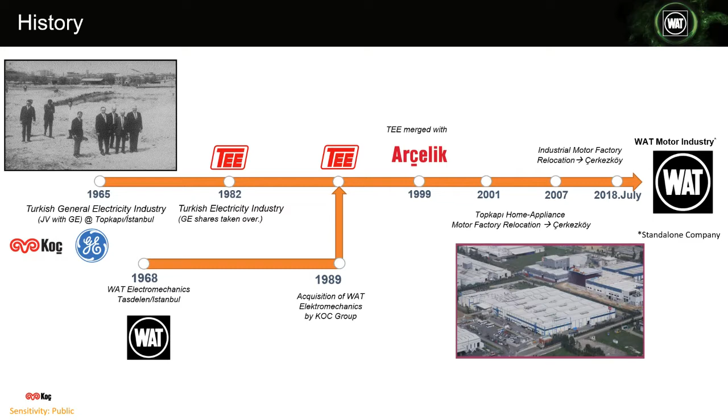WAT Motor's history dates back to 1965 with the joint venture of Koç Group in Turkey and General Electric of the US. What's known as Turkish Electric Industry, TEE, acquired some extra factories and merged with Arçelik Group, which is active in durable house goods. In 2018, WAT became a standalone company, mainly focused on electric motors and its electronics.

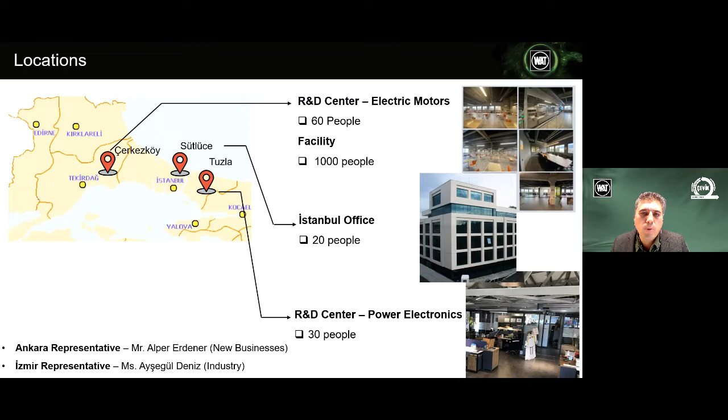Our locations are in Turkey, and we are mainly active in the European region and some other locations. Our factory and headquarters are located in Çerkezköy, where about 1,000 people work. Also, our R&D center on electric motors is located in Çerkezköy. We have a marketing and sales office in Istanbul, and also a second R&D center on power electronics in Tuzla, in the Istanbul area.

Our facility has a 40,000 square meter closed area, and we are about 87 kilometers away from Istanbul airport, and we are very near the Greece border.

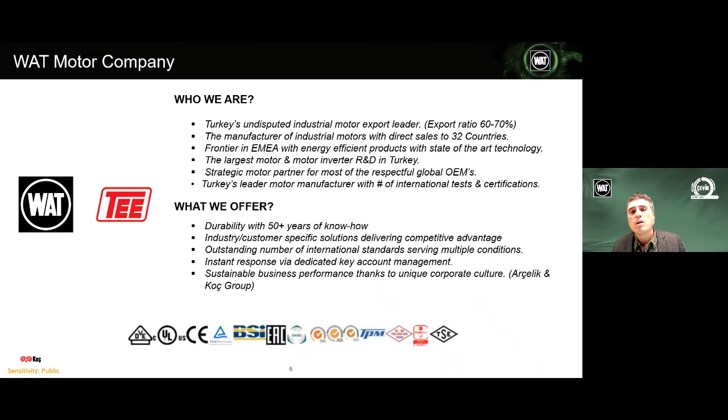As a short introductory note, WAT is the export leader in Turkey on electric motors. We are mainly active in international sales and export markets. We have the largest electric motor R&D center in Turkey. We are the strategic partner of most of the blue chip, respectful global OEMs, mainly in the European area. And we are also the leading Turkish electric motor manufacturer in terms of international test certifications and compliance documentation.

As I said, our company is active in export markets. Our main export market is the European region. We also export our products to the US market and the Far East market. We are the only company that exports products to China, provided by the China Energy Labeling compliance documentation. We also want to increase our penetration into the emerging markets.

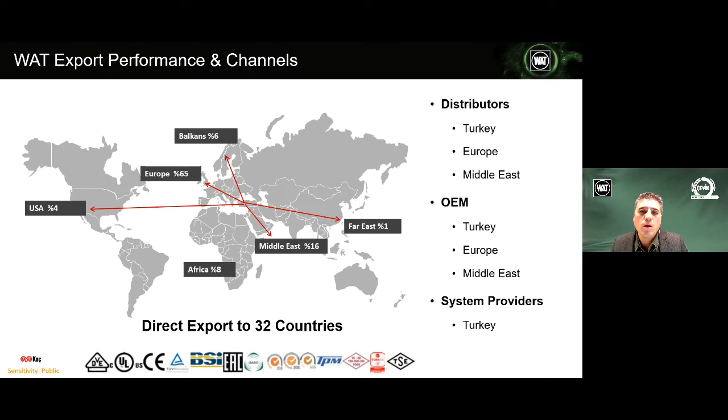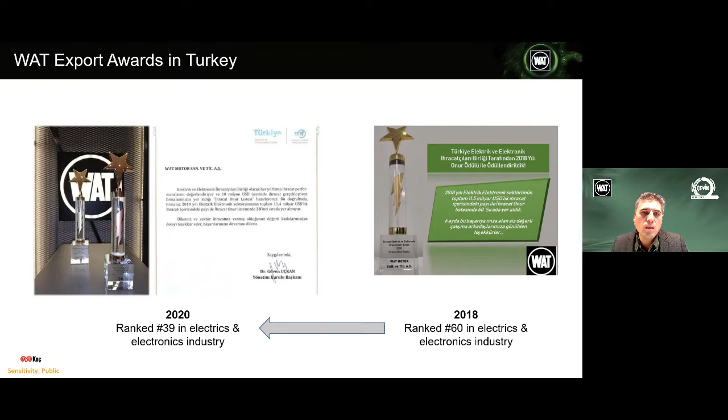We have some export awards in Turkey. We are ranked in 39th place in export of electric and electronics goods.

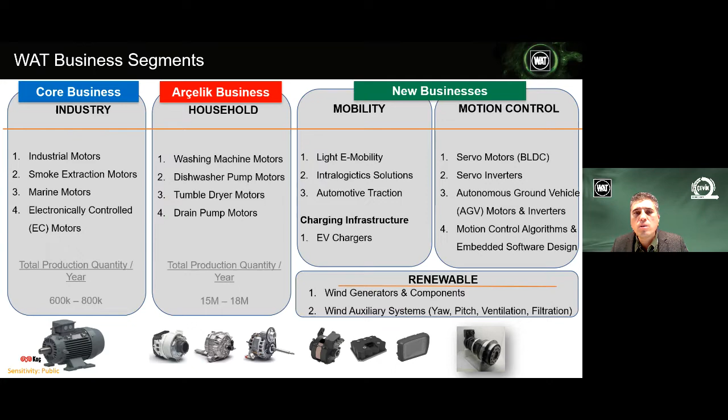We have two main businesses: first, industrial motors; the second is production of household electric motors. We also have several new business areas, those being electromobility, motion control, and renewable energy components.

Also, our production and new investments are supported by the Turkish government. We have incentive programs from the Ministry of Turkish Technology and Industry. Those incentives are announced by the President of Turkey.

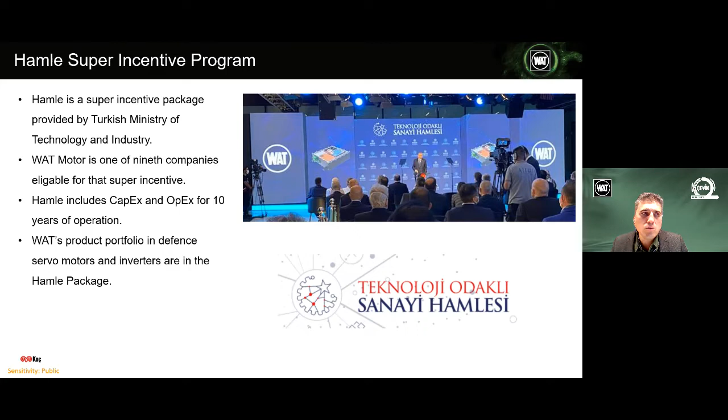As I said, we have a very good R&D capability. We have 90 people in R&D, nearly 70 of them engineers and designers, and also 20 colleagues working as office technicians and laboratory technicians. We have all the background of software inventory and testing in our laboratories, including testing of electric motors.

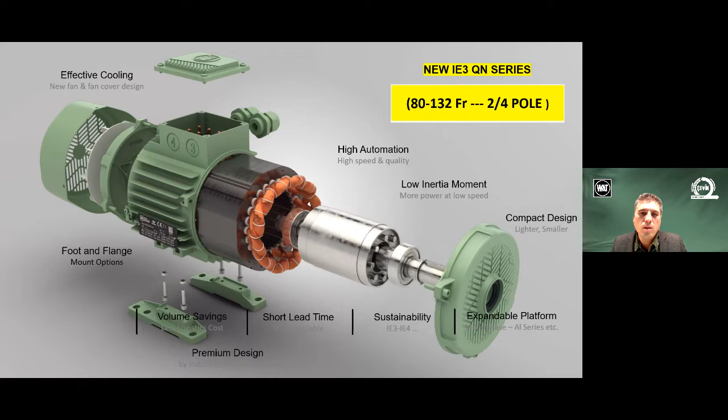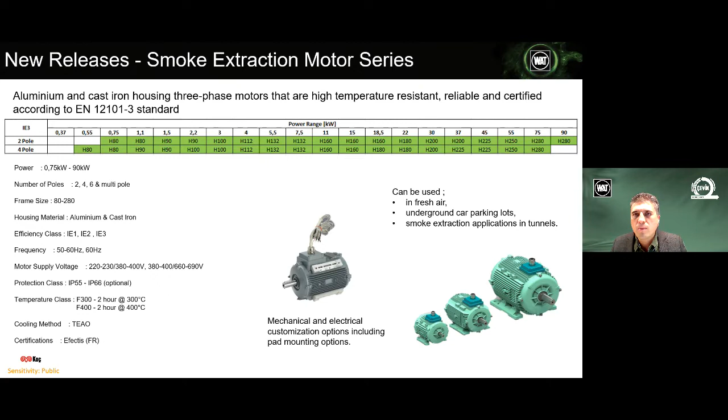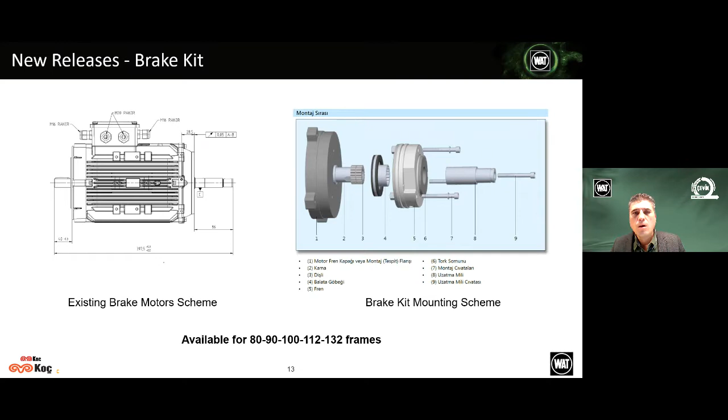For the new release, another example is the brake kit option. We are providing a brake kit option for certain frame sizes: 80 frame, 90 frame, 100 frame, 112 frame, and 132 frames. This is a very convenient solution for the product.

We have a small introductory video about this solution. You can get this brake kit option and convert your non-brake motors into brake ones with the help of an end shield. This end shield could be integrated, along with some extension part for the shaft, an extension kit for the shaft, and you can also insert fan blades and a deep fan cover for this solution, converting your non-brake motors into brake motors on your own.

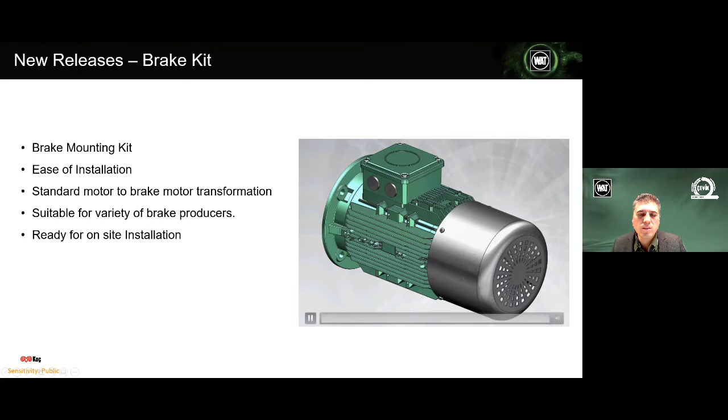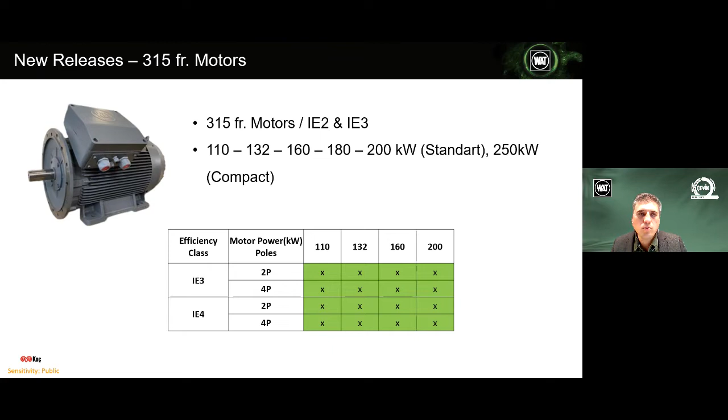We also start to produce 315 frame electric motors up to 200 kilowatts. Those motors could be provided both in IE3 efficiency level and IE4 efficiency level, in 2 poles or 4 poles. We can support you with this product as well.

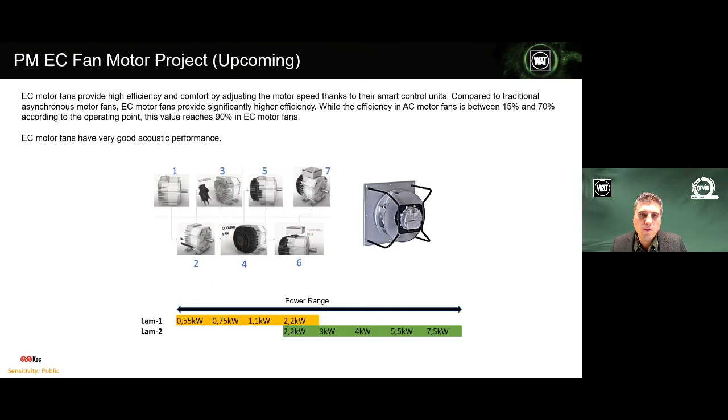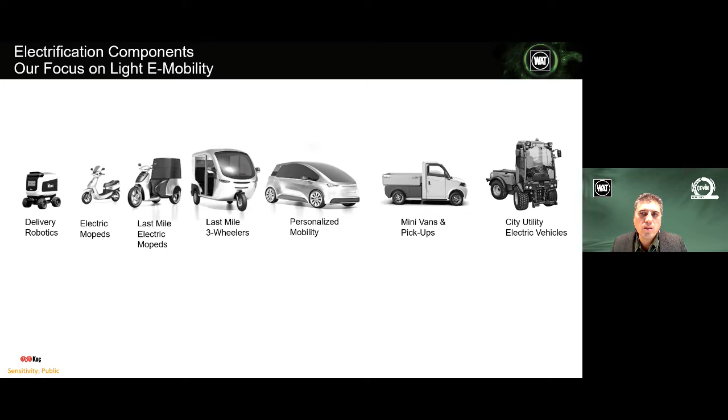As a new project, we are now working on electronically combined, or electronically controlled, electric motors. We will use these products in various applications. One main application could be the ventilation business segment. Also, we have some outputs in mobility, mainly working on light e-mobility solutions. We just introduced our electric traction unit electronic set for HMIs, onboard chargers, BLDC motor and BLDC inverter, which could be used in electric mopeds, electric motorcycles, for personal use or for last mile delivery issues.

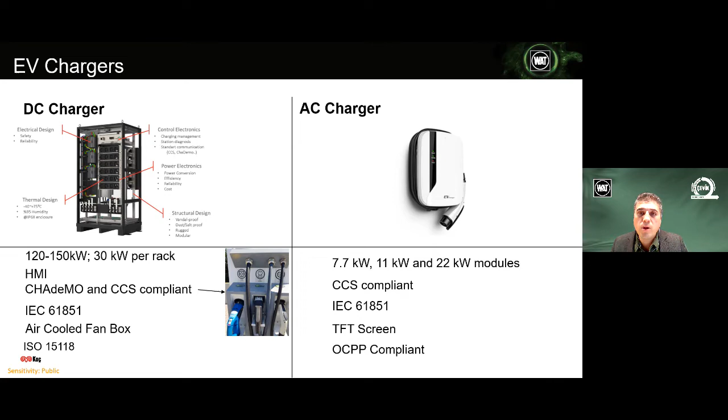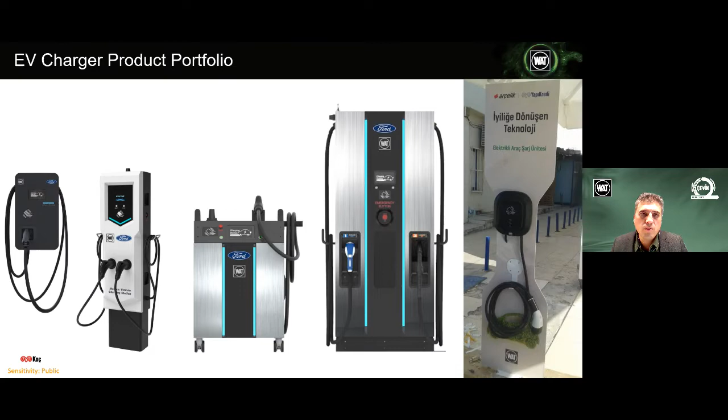We have also added some AC and DC chargers into our product portfolio. We provide those products for public charging or for private use. Those are some examples of our product line in EV chargers, and on the right-hand side you can see our first installation at Yapı Kredi Bank's Bodrum branch. We will also increase the numbers of those EV chargers, both in private and public use.

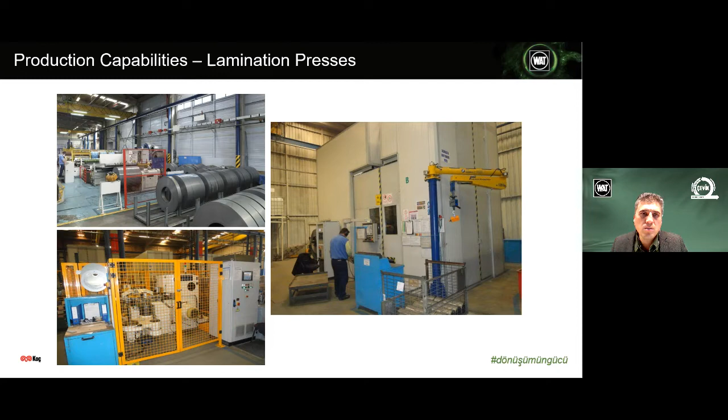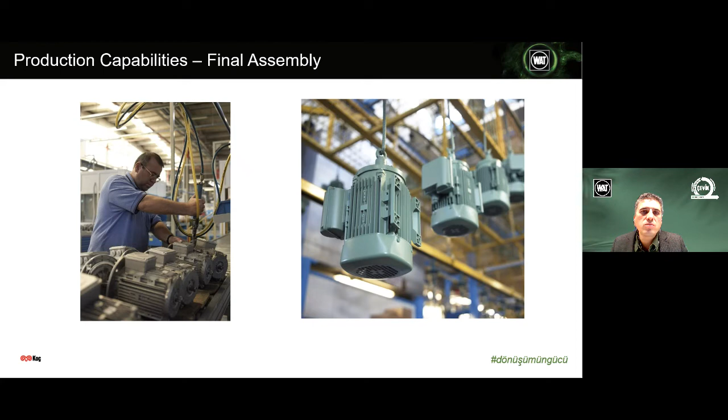I already mentioned some numbers about our facility. We have very good production capability in terms of lamination presses, Stator and Rotor production capabilities, winding and varnishing premises, and we have final assembly spots where we also make our performance test on the line. We have a very good inventory for production indeed.

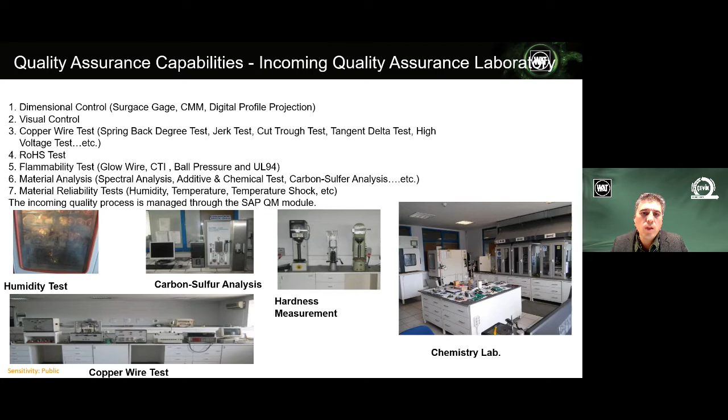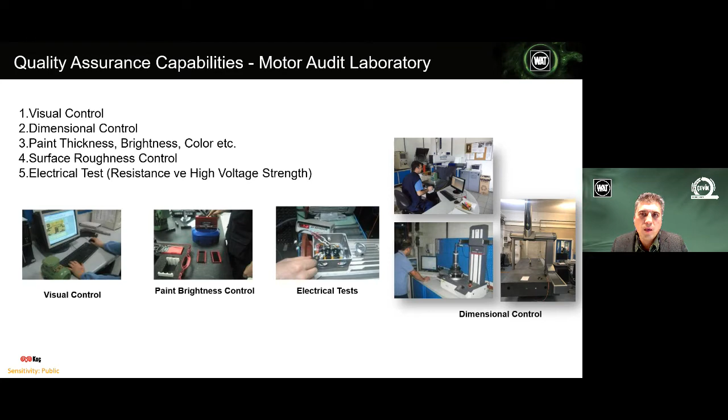We have seamless quality assurance capabilities, starting from incoming quality. We have a specialized incoming quality assurance lab, and also a motor audit lab for keeping production running smoothly. We have several facilities for motor laboratory testing, including environmental testing.

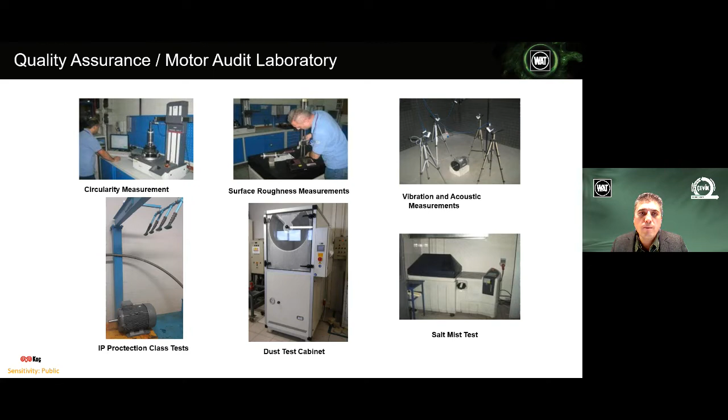Those are very brief information of what we have been working on at WAT Motor. Thank you for your attention. I would like to convey the speech through my dear colleague, Mr. Ibrahim, for the technical part. As I said, at the last part, we will answer your questions on this special topic in the Q&A session. Thank you very much, and hope to see you at the final stage.

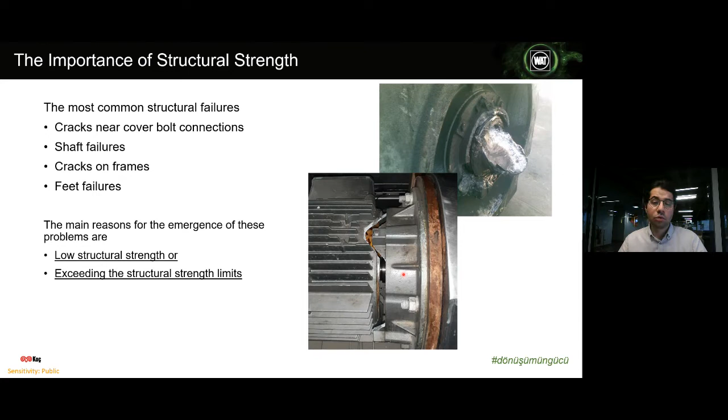Structural failure of machinery equipment may cause damage to peripheral equipment and systems, disruptions in mass production, and therefore loss of profit and production. And most importantly, it can pose a very serious risk to human health as well.

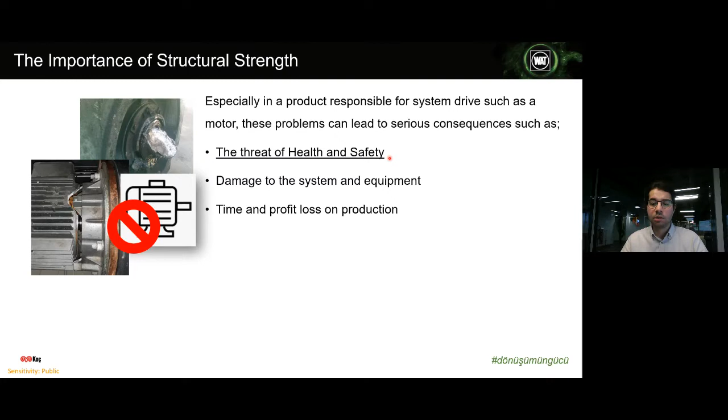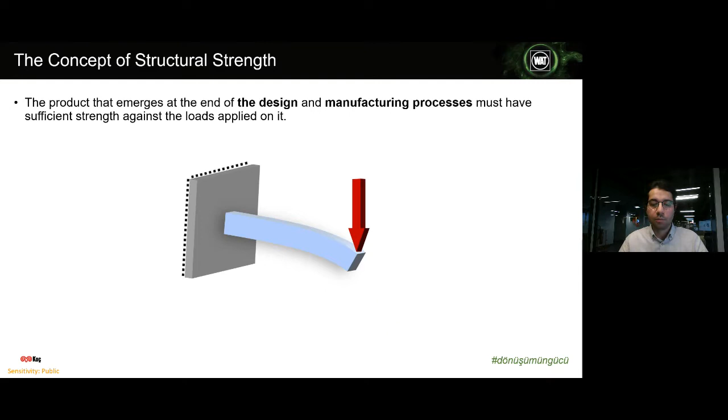To make sure of this, we must review the factors that affect structural strength. For example, geometry includes important parameters that affect the rigidity of the structure directly. As you can see, the amount of applied load directly affects the stress formed, up to a limit.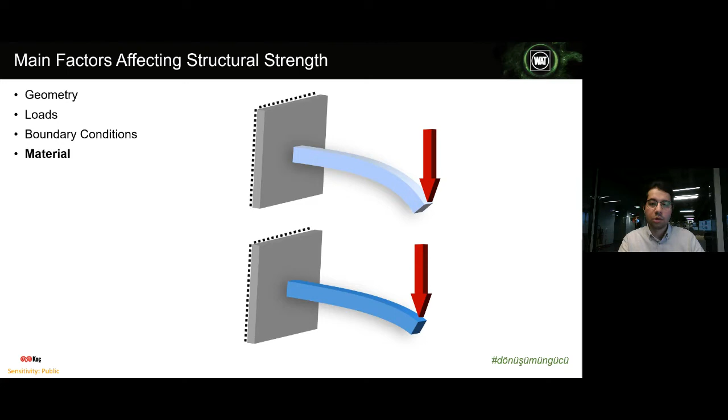Boundary conditions determine how the applied load will affect the structure. As a result, it changes how stress distributes over the structure. And finally, material properties determine whether the structure withstands these stresses that occur under all of these conditions, or fails. For example, the yield strength value.

Let's take a brief look at the paths we follow in conducting structural analysis. Let's imagine that the important factors we've just mentioned come together to form a static structure like this one. In order to create this setup, after the necessary research is done and information such as CAD data and material information is collected, a copy of a real structure is tried to be created

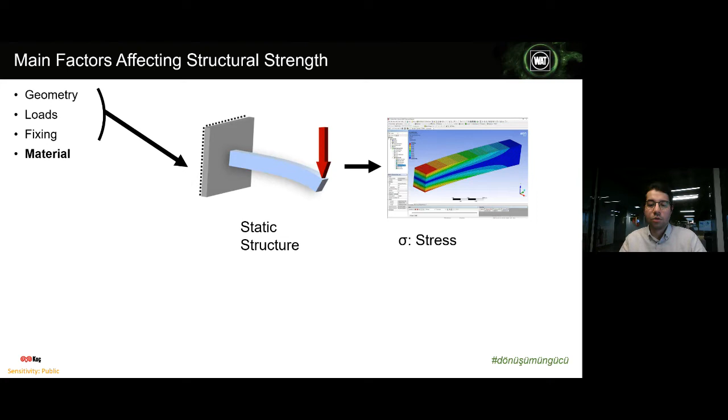inside the computer environment, which is called a simulation model. After applying the conditions to this virtual copy, the computer gives us the stress distribution map, just like this one. Stresses are important for our study of structural strength because structural failure theories say that structural failure occurs as certain stress limit values are exceeded.

For example, the von Mises failure criteria. To find out these limit values, we look at the properties of materials, such as yield strength value, or such as fatigue strength limits for cyclic loads.

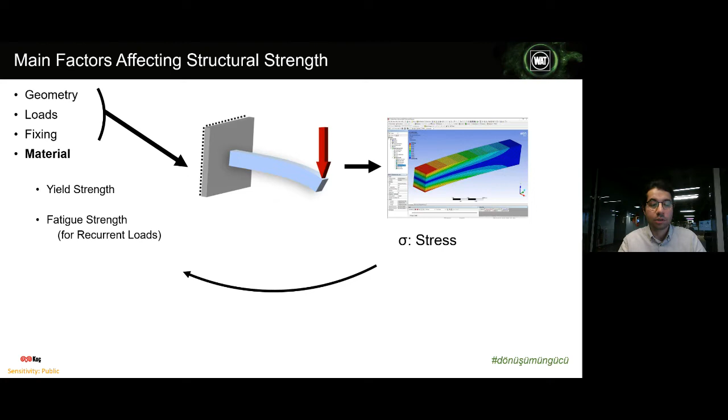To be able to compare these criteria in a simulation environment, first we need to get to know the structure a little more. For this reason, let's take a brief look at the mounting types of the motors. We can divide motors into two main categories: those that are mounted from the foot, and those mounted from the flange, right here.

Foot-mounted motors, like those ones, are connected to the outside world by feet attached around the body. It can be connected in various orientations, and orientation changes the direction of gravity, especially for large frame motors, it becomes more and more important.

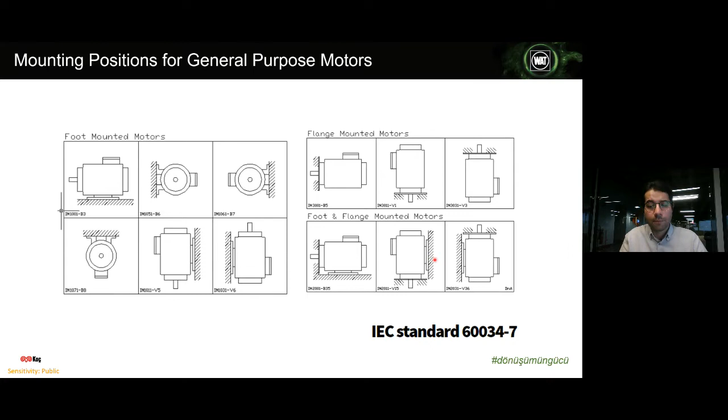Flange-mounted motors are connected to the outside world through the drive end covers that also house the output shaft. And again, as you can see, they are connected in various orientations as well.

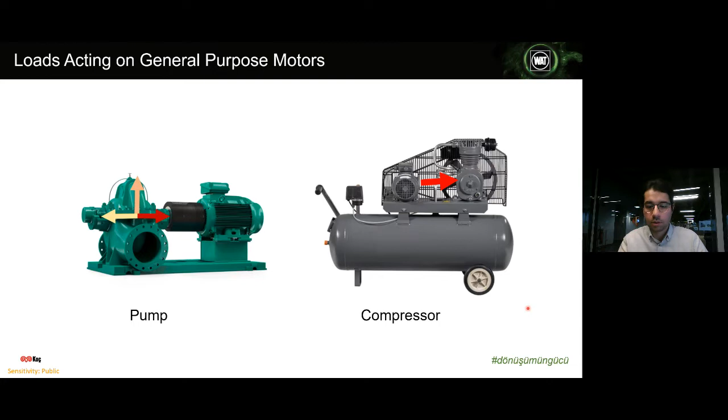Now let's look at the loads that can be applied to the electrical motor from the outside. Motors can be exposed to various load cases in various applications, such as pumps and compressors. These loads can be applied to the motor in radial and axial directions from the shaft output. However, the axial load needs to remain low due to bearing limit values for standard applications.

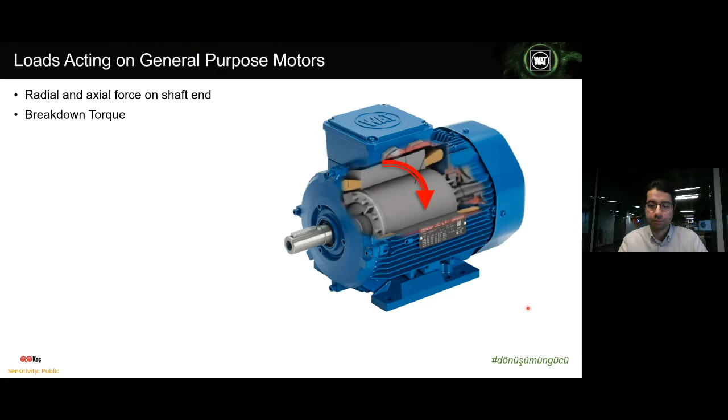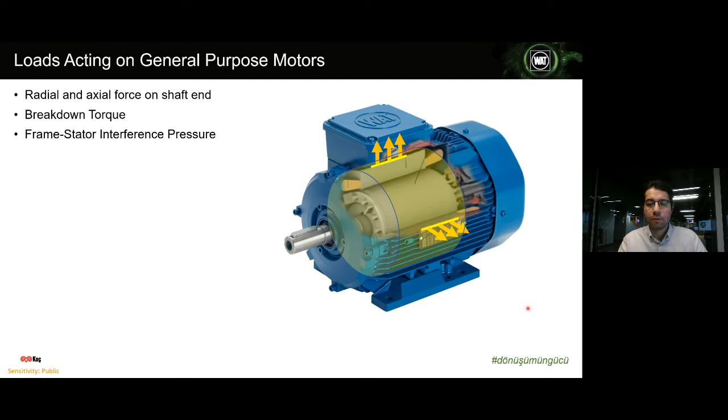In addition to external loads, the electric motor can also be exposed to a breakdown torque caused by electromagnetic forces created by itself in sudden situations. In addition, according to the assembly types of the components, preloads may be present between the components, for example, frame stator interference pressure and bolt pretensions.

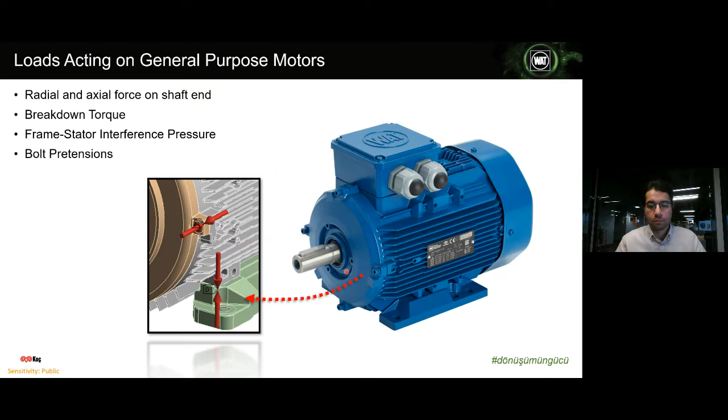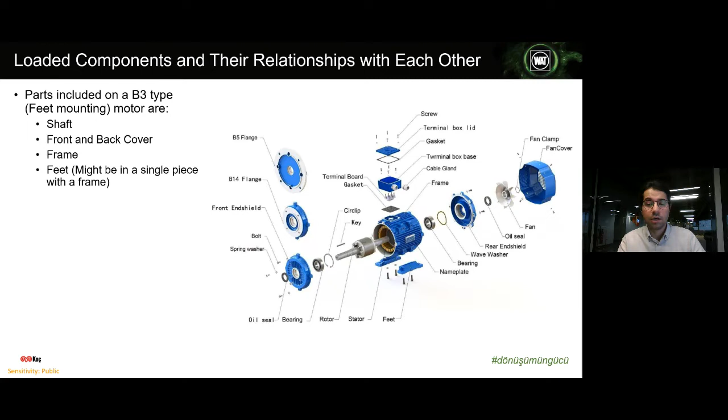These ones. Electrical motors consist of many parts that transfer loads to each other. Among these parts, we can say the shaft, covers, body, bearings, and feet carry the greatest loads. The load applied from the shaft end is first transmitted to the covers by means of bearings.

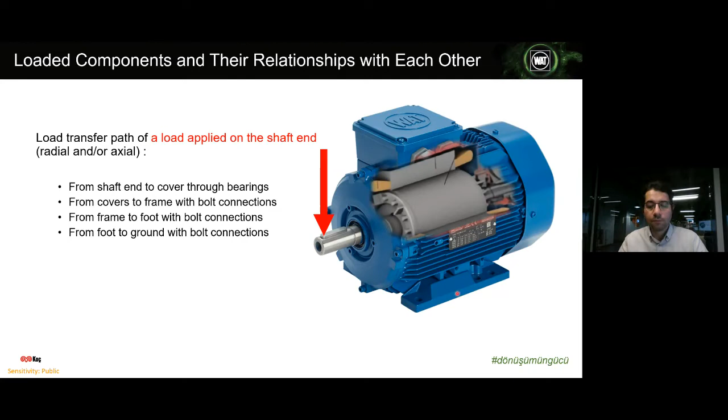Right here and on the non-drive side, it is transferred to the frame with bolt connections over the cover, and from the frame to the feet, and feet to the ground with bolt connections as well. The breakdown torque is transferred from the stator frame contact surface to the frame body, and from the frame to the feet and finally to the ground in a similar manner.

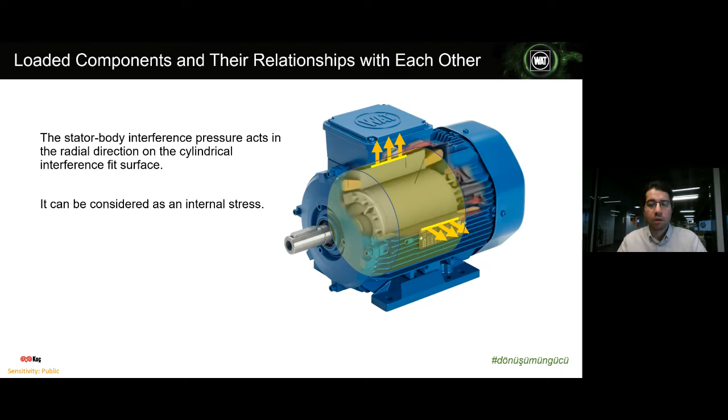The stator-body interference pressure acts in the radial direction. The cylindrical interference pressure, fitting pressure surface, can also be considered as another internal stress.

If we look at the material properties, we see different yield strength limits in different materials. These values may vary in different contexts. But for example, if you look at the stress strain curve for steel in this part,

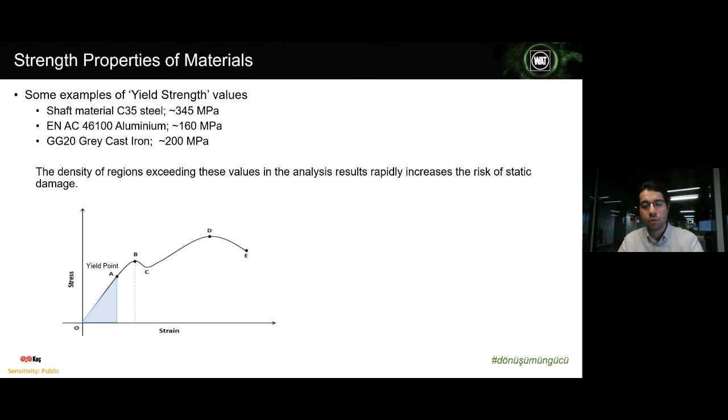we can see that the linear behavior starts to change after a point. This point is where elastic behavior ends and permanent deformation begins. For static structure, we would like not to exceed this point in stress value. As a result, no permanent damage is observed on the structure after the load is removed.

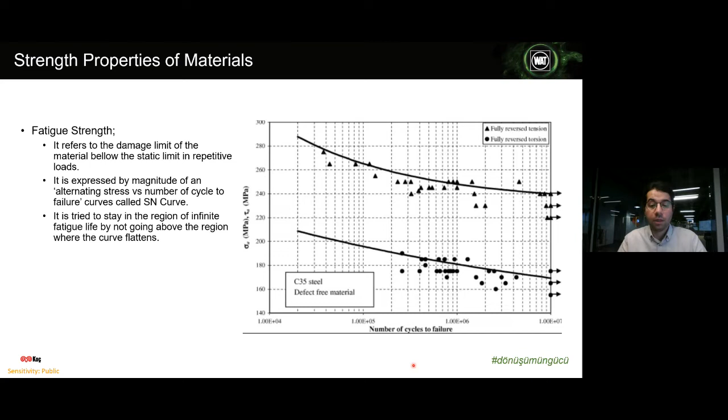Fatigue is the value at which stress values that cannot reach that static limit begin to damage the structure repeatedly, which may lead to structural failure as well. Theoretically, for infinite fatigue life, it is necessary to stay below the area where the SN curve flattens, like these ones.

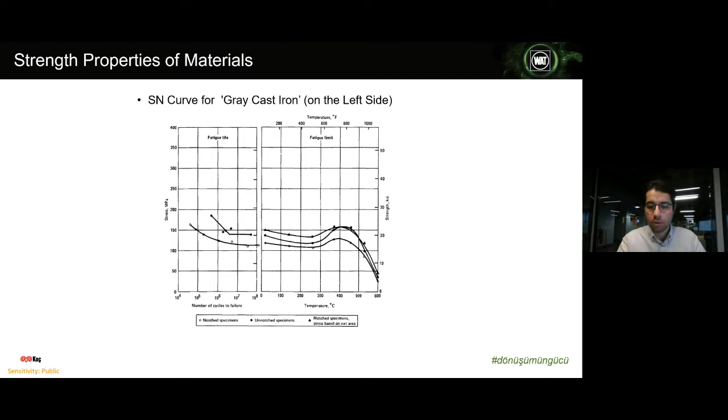And there is another example for the SN curve. Also, the SN curve for gray cast iron is presented.

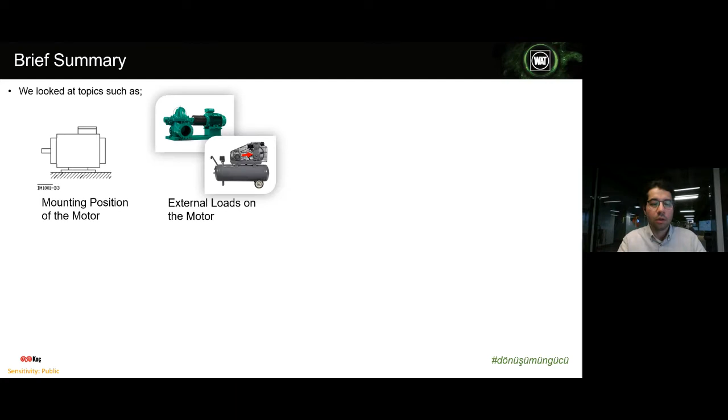Okay, let's make a little summary. We looked at so far topics as mounting positions of the motor, external loads acting on the motor, and internal connections and loads of the motor, material properties which we need to know.

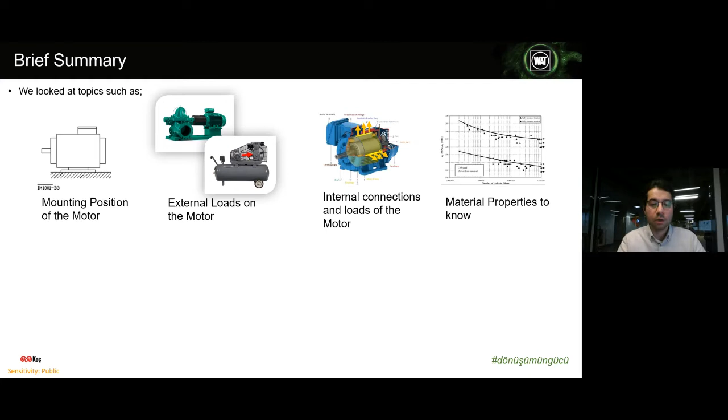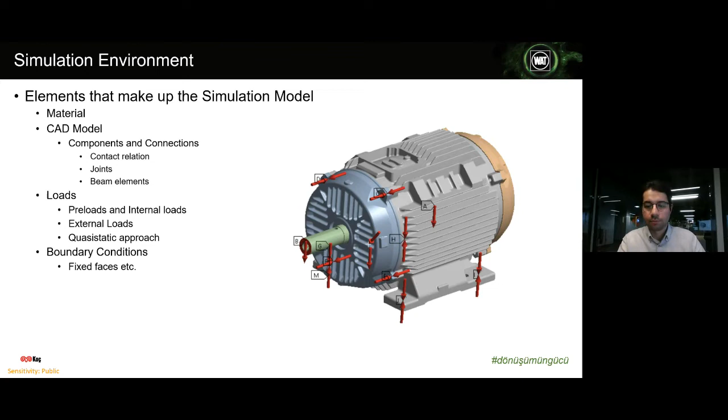Now we can gather them all and take a look at their equivalence in the simulation environment. In fact, our simulation model consists of factors that are important for structural strength, just like we mentioned before. It is necessary to define the material by making use of libraries or research that contain material properties, such as elasticity modulus and density of the material.

We need CAD data as well to get the geometry of the components, their position and orientation in assembly. And we define the contact areas that are touching in real life within this data, manually or with some automated tools and with some surveillance.

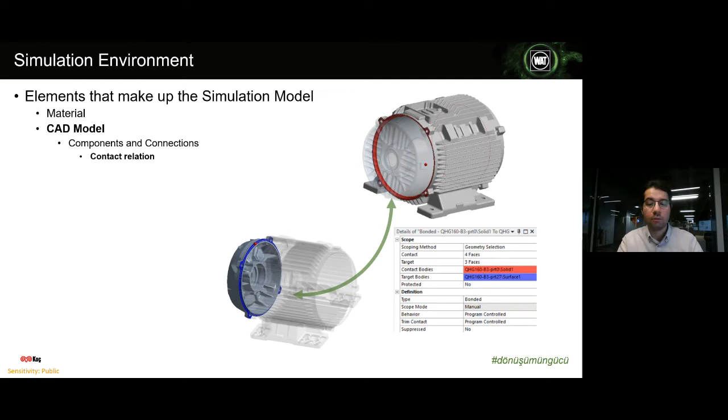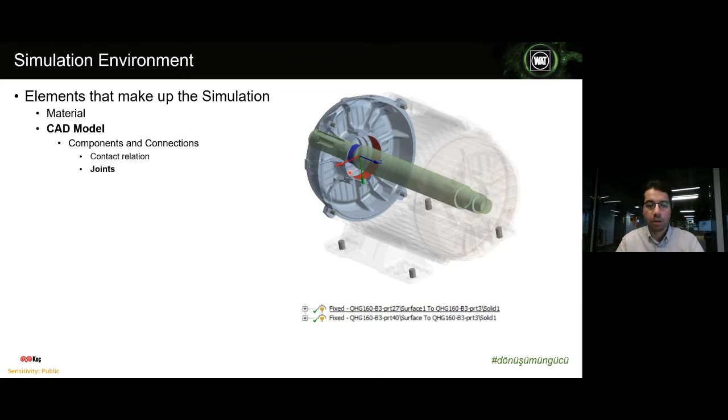Similarly, to simplify the model, we define remote effects of missing components with joints, like bearing effect from shaft to the cover, just like here. For example, while bolts are not available as 3D CAD data in this assembly, we define them as beam elements.

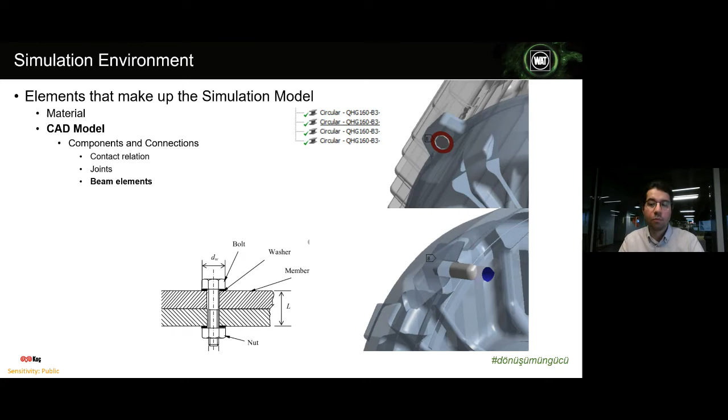As a result of all these stages, we have obtained a model whose material is defined, connections and boundary conditions are determined until now. Now we need to apply the internal and external loads acting on the motor to our model.

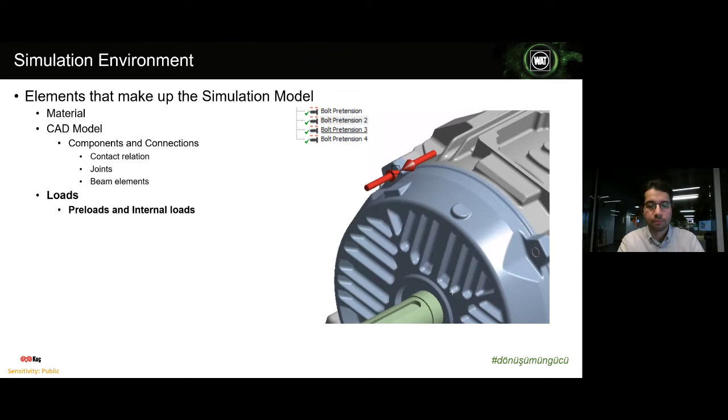Let's start with preloads first. We need to apply the clamping forces calculated by analytical means on the bolts we defined earlier. We also apply the pressure caused by the body and stator interference to the frame surface inside here.

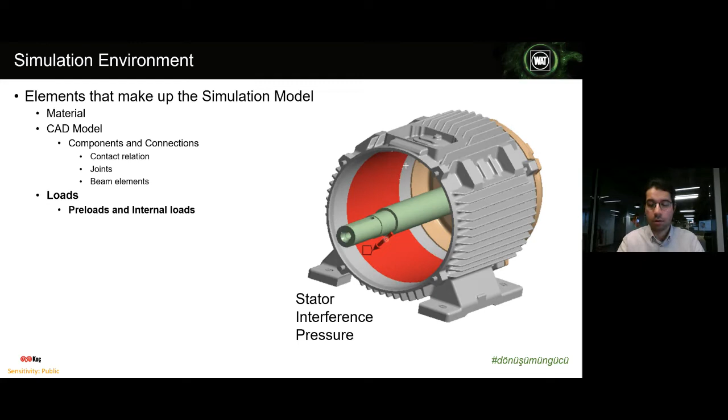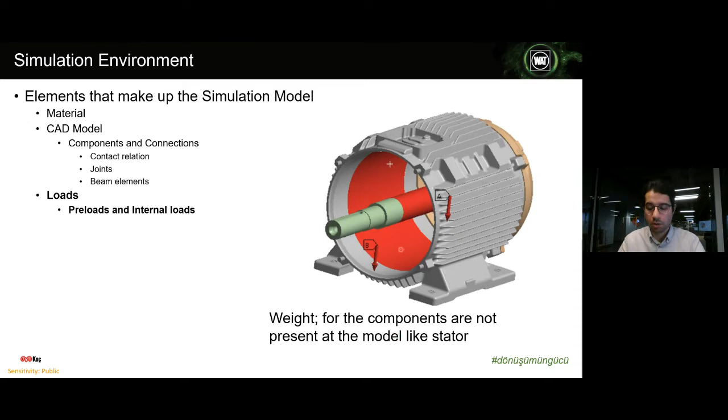We also include the weights of the components that are not included for simplifying the model, such as stator, to this area. If we look at the external loads, we apply breakdown torque to the stator contact surface area and the radial load to the shaft end from here.

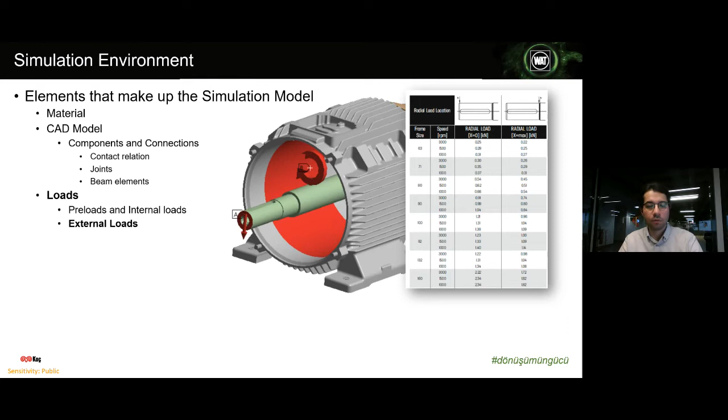While we reference catalog values for shaft end radial forces, we use information from the electrical design team for breakdown torque values for new designs.

However, it is necessary not to consider the radial load acting on the shaft in a single direction. The electrical motor can be subject to radial loads in different directions in different system designs.

For this reason, we can obtain a quasi-static state in the analysis by defining the radial loads, separating its vectoral components and changing these component values in a sinusoidal construct, just like here.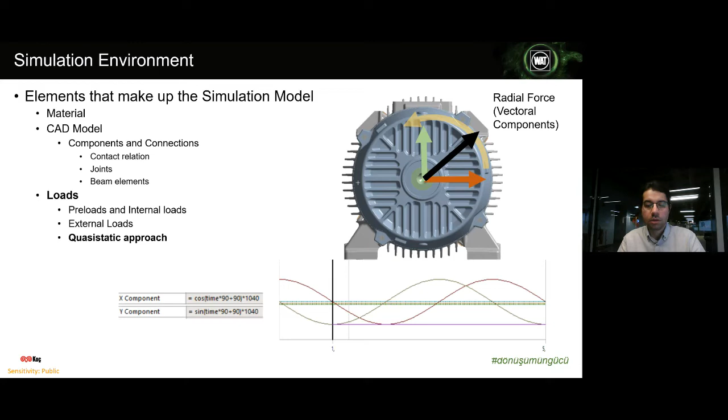Structural strength analysis against loads in different directions can be examined according to these defined steps here. Our boundary conditions are also usually defined in regions where our models connect with the outside world. It is important to use linear boundary conditions whenever possible to obtain analysis results earlier and optimize the model.

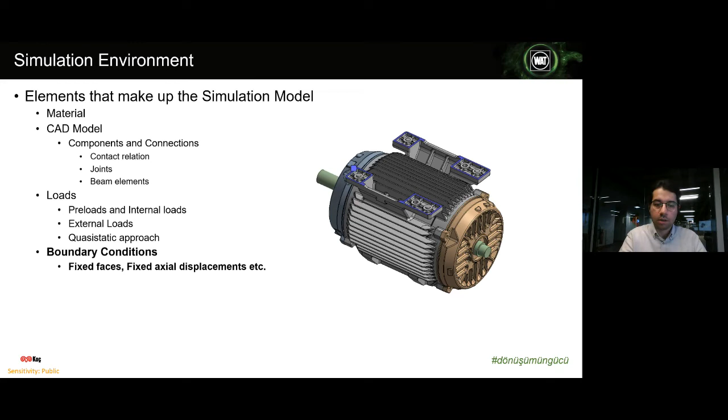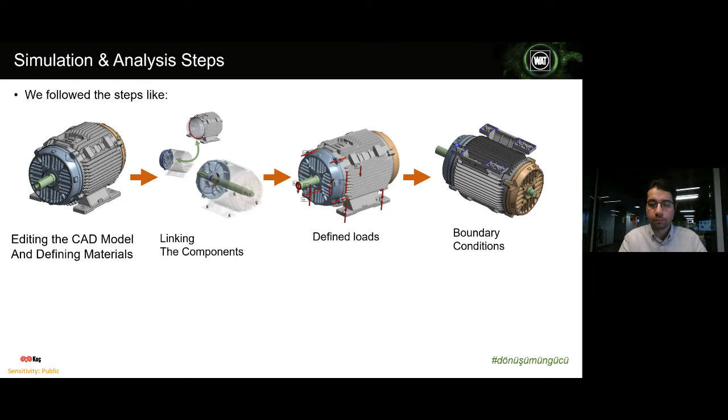If we examine the stages in the simulation model, we will see editing the CAD model to fit our results, defining the materials for every component, linking the components together with tools, and then defining loads and finally defining boundary conditions.

Next step is to extract the mesh structure by discretization of the geometry. Various methods have been developed for this operation, but mesh structure affects simulation time and the result accuracy. Thus, we need to combine these operations to achieve optimal mesh structure.

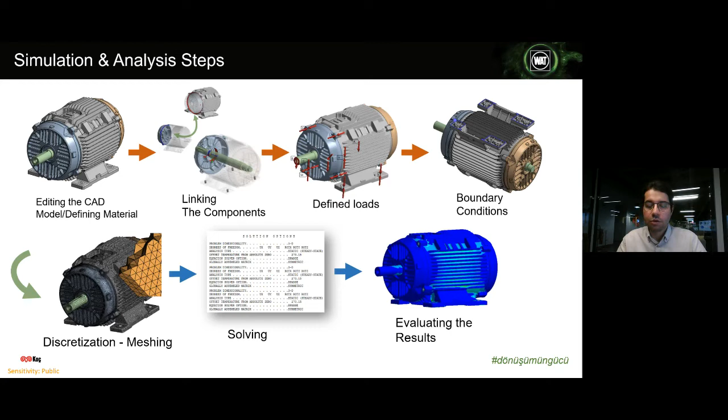Later, as a result of all the information given to the computer, the simulation program generates the strain distribution map by solving the geometry segmented with mesh. Based on the strain map, the stress and displacement distribution can also be created.

From all the assumptions we made in the prior steps, the numerical method induces errors, and there are errors in the model we built. A resulting error occurs between the actual stress and the stress simulation output. Up to a point, some amount of this error is natural.

To minimize this error, measurements are recorded with the strain gauge sensors and validations are made, and errors in the model or assumptions are reduced as far as possible.

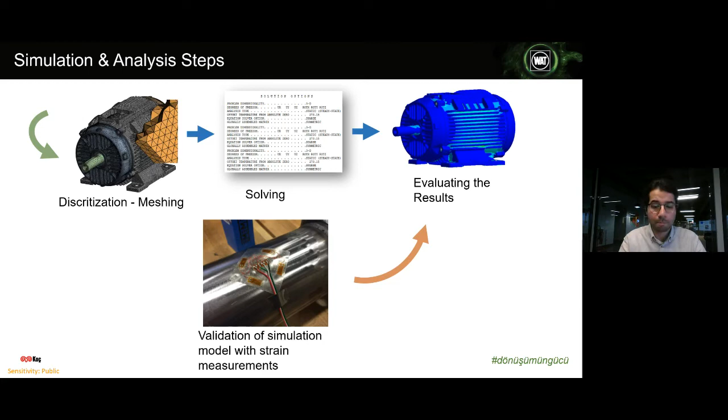According to the von Mises criteria, this equivalent stress value is taken into account for ductile materials, and these values are compared with the distribution on the structure. For example, aluminum alloys.

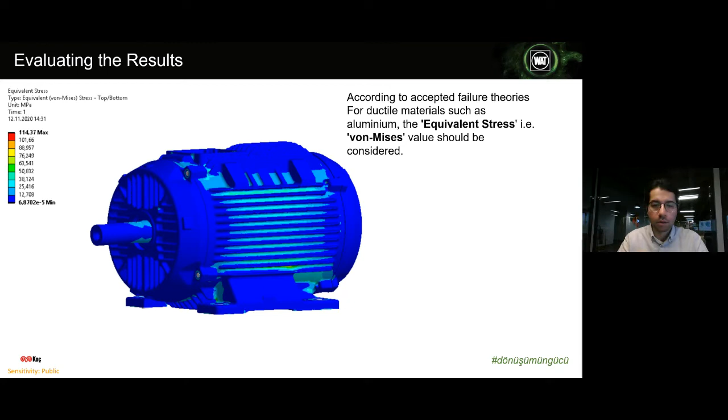Another evaluation for the results: just like brittle materials like cast iron, the maximum principal stress value is taken into account for similar criteria.

Stress distribution you can see on a cover, but when evaluating these results, rather than taking a singular maximum point value in the geometry of the stress distributions, the values that have a wider spread on the structure are examined, and these values are compared for the strength limit values.

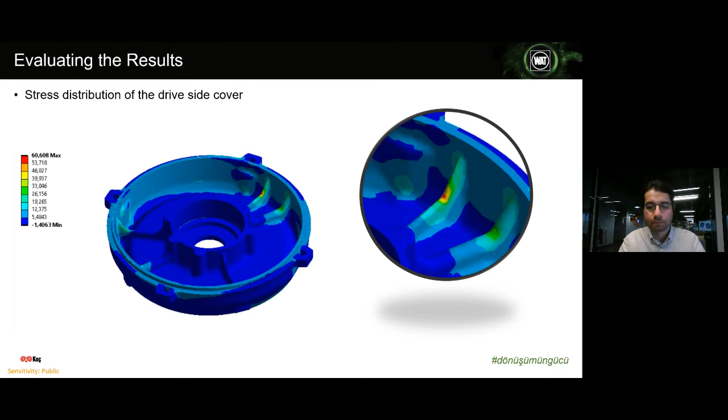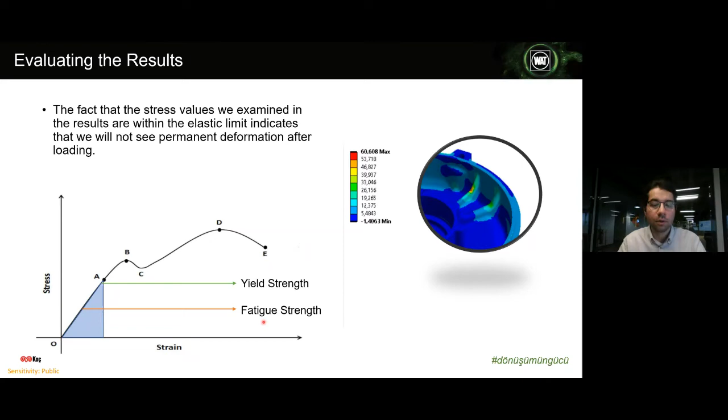And we can make some deductions. We take those results and compare them with the material's yield strength value for static evaluation, or for cyclic evaluations we consider fatigue strength. But to achieve infinite fatigue life, it is better to stay under this fatigue strength with a factor of safety value.

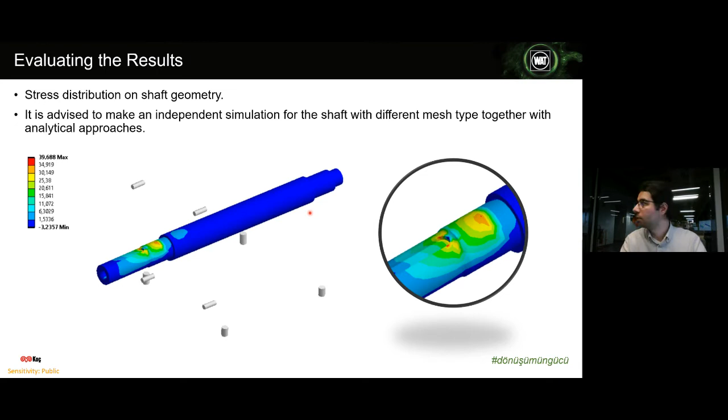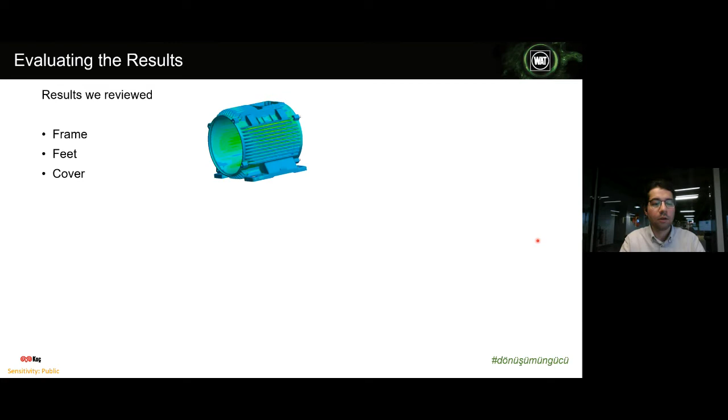As far as we reviewed, some results like frame, feet, and cover are other important components to review. Also, there are some other components as well.

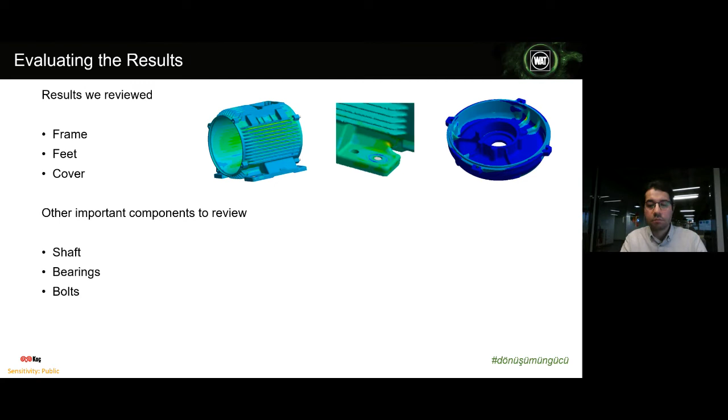Other components such as bearings, bolts, and shafts that make up the structure should also be evaluated with analytical tools or numerical tools such as finite element analysis.

I may wrap up the presentation. Thank you for attending.